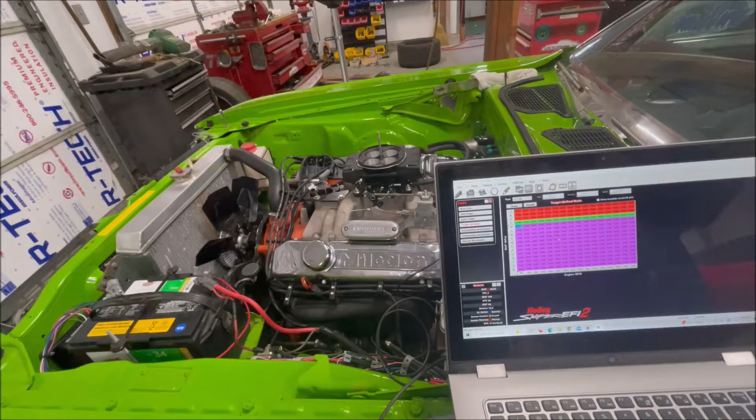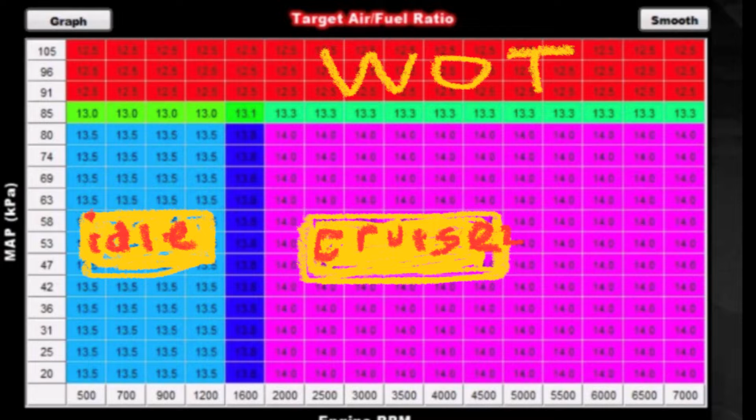All right, so we're gonna work with the first part of setting one of these things up. And one of the things that you need to do is you need to go into the target air fuel ratio table. And if you look just how generic they set it up, okay? Here's your RPM, here's your vacuum or your map sensor here, okay? And as you're idling, you're usually somewhere around here. And as you start to accelerate, it moves up and up. And here's wide open throttle at the top. So these are just set up very generic, okay?

What you need to do is, like I explained in the previous video, is you need to figure out where your car idles. And you'll look over here and find out where it idles. And then you need to figure out, hey, what is it like, okay? And I always start with the fuel first, and then I'll go to the ignition timing after I've kind of figured out what I want. And there's just basic knowledge. I mean, unless you're turbocharged, if you're just a naturally aspirated engine, stuff's pretty basic, okay?

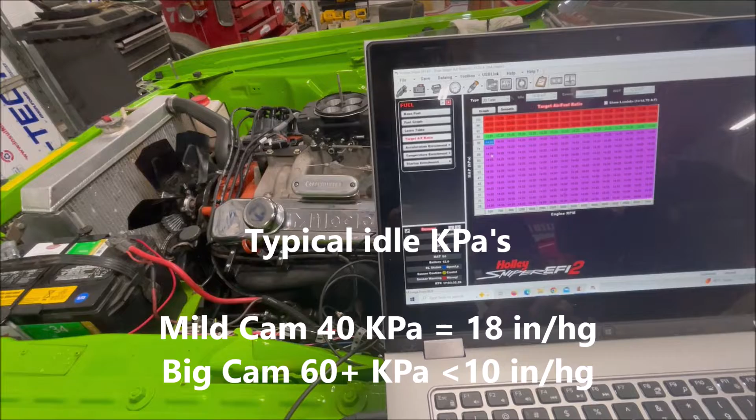So this engine's got a really big cam in it, and so it really doesn't make a whole lot of vacuum, and I don't know specifically really yet what it was idling at KPA-wise, but I'm gonna assume it's up here in the 60s. And 14-to-1 on this engine is probably okay. What I'm gonna do above this here is take this 14 and I'm gonna bump it down. And so I usually just use the control button and the down arrow keys, and we're gonna drop those things down.

And the nice thing is Holley uses a heat map, so you can see where your things are changing. And as far as cruise values go, 14-to-1 is pretty good here for the most part. On a milder engine, man, I'd have this thing cruise at 14.2, 3, 4, 5-to-1. Idle, same thing, 100%. So one of the things I'm gonna do here is actually take this thing, and in these upper ranges, you're only gonna use these most of the time as you're accelerating from an RPM. It's gonna go up and you're gonna want more fuel in there. So we're gonna lean those out, or richen those up a little bit.

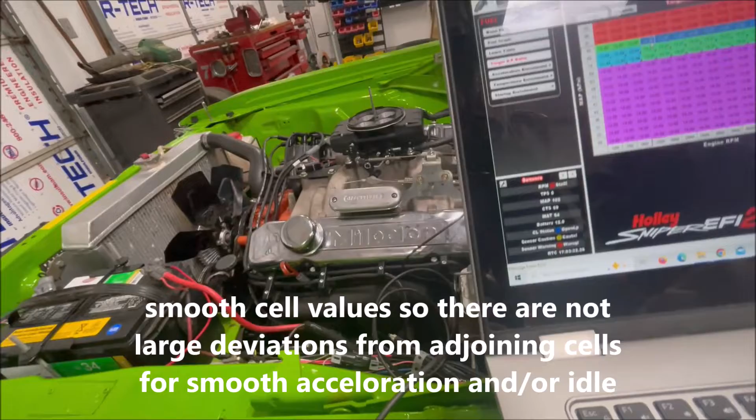So what you can do is, this is just going to be our preliminary stuff here. And you're going to want to take and you can kind of smooth the transitions. These don't have to be all the same values. You can take and step them so they change as they go. In fact, we'll take this row here and we'll drop it a little bit. And 12.5-to-1, that's fine. On wide open throttle, I generally would do anything from 12.5 to 12.8, depending on what you got. So anyway, that's what we've got for target air fuel ratios.

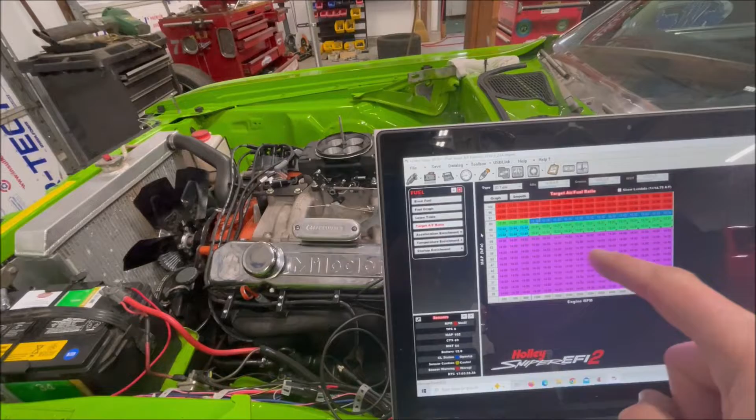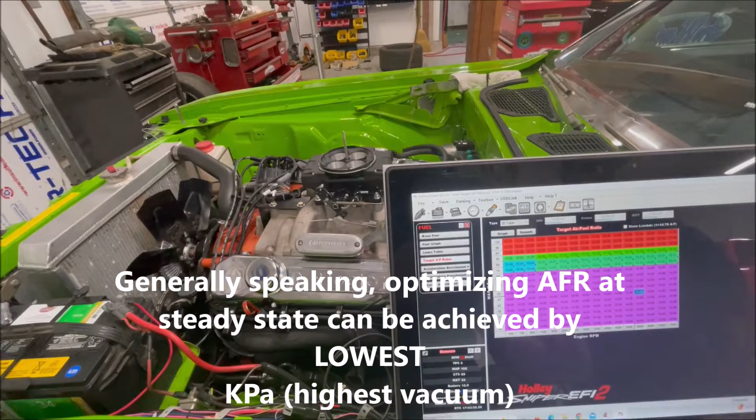Just changing them. And as we run this thing, I'm gonna play around with them a little bit. When I absolutely find out where this thing's cruising at like 60, 65 miles an hour down the highway, I'm gonna play with those and see what the engine can tolerate. You kind of want to go as lean as you can without it being an issue. And one of the things where you'll find if it's an issue is if you're trying to pull a grade or something like that, if it's got too much timing or it's too lean of a fuel mixture.

So I'd always try to err a little bit on the richer side than the leaner side. So we're gonna go over here to spark, okay? And again, you see how it's grayed out? And by the way, once you change this with the laptop and you go to the 2D table like I'm doing here, you won't be able to change your idle, cruise, and wide open throttle values from the handheld anymore.

So as far as spark timing goes, I'm not sure specifically what this engine's gonna work at. 16 degrees is pretty good. But it goes 16, 24, and then 34. I'd rather see a little bit more of a transition myself here. So what we want is once you bump it off idle to start ramping it up a little bit. So we're gonna actually add a little timing here to make the transition a little smoother. So we bumped it to like 19 degrees, and you can see it changes.

Now on a Mopar, a big block Mopar, it's 38. So I'm gonna leave it 34 here, and then we're gonna have it basically gradually go up to 38. But I think I'm gonna start with maybe 36. So what I'm gonna do is kind of go from here, highlight these cells here, and then we'll bump them up. 36. Okay. And we've got 36, 35. I think this row here, we should probably make it 35. And we didn't go to the 36, excuse me, 36.

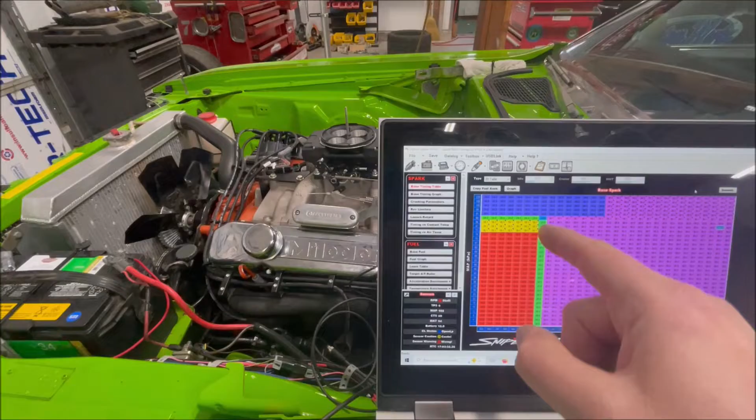So basically, again, this is going to be your idle range. This is going to be your cruise range. This is going to be wide open throttle. And what you want to do is smooth the transitions in between the two. You don't want big jumps. The way they've got this set up is it's got big jumps in it. And one of the things that you can do, there's a button over here, a smoothing button. So if you have values here that are low and high here, it'll kind of transition them in between. And that's kind of a good feature.

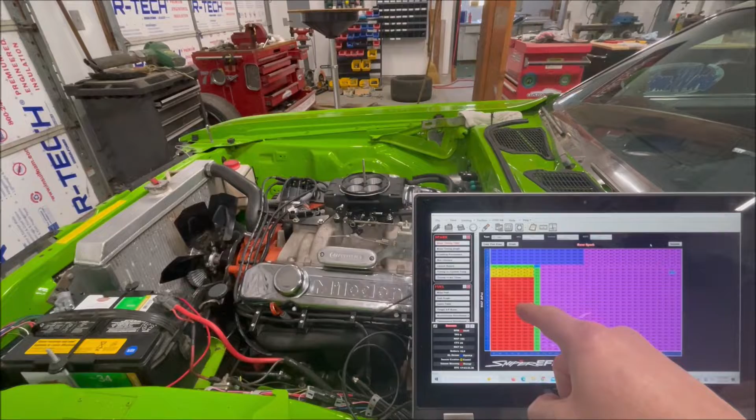So once you get your main areas fixed, like I said, I'm going to run the thing. We're going to run it at idle, figure out where it idles, and then we're going to drive it and find out where it cruises at. We know where wide open throttle is. Wide open throttle is going to be right here at that 95 to 105 kPa. So anyways, we'll fire this thing up at idle, and always start first with the idle before we do anything else.

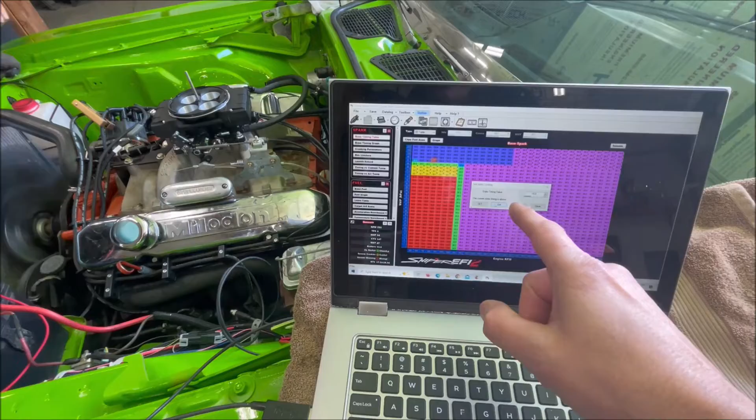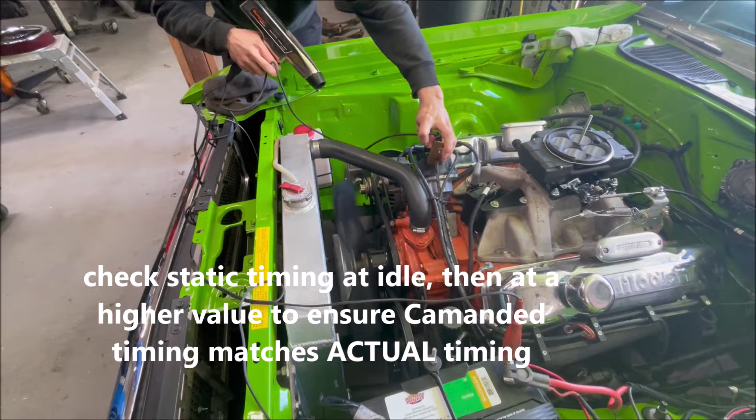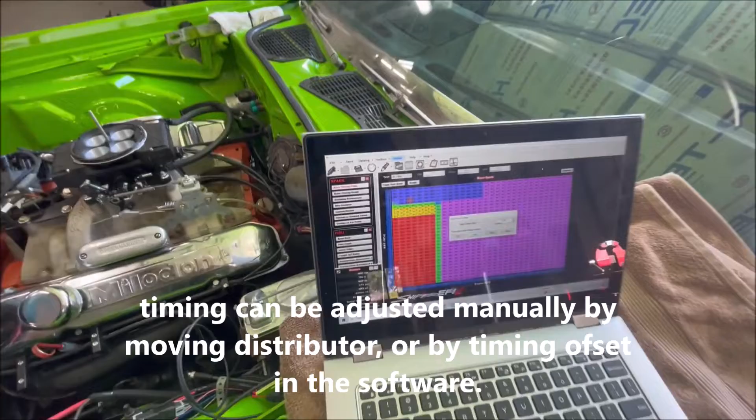Okay, so we've gone into the drop-down menu here, set static timing. We've set it at 15 degrees. Now we got the timing light. And we've confirmed that we are at approximately 15 to 16 degrees, and that's close enough for now. We'll check it later at a higher value.

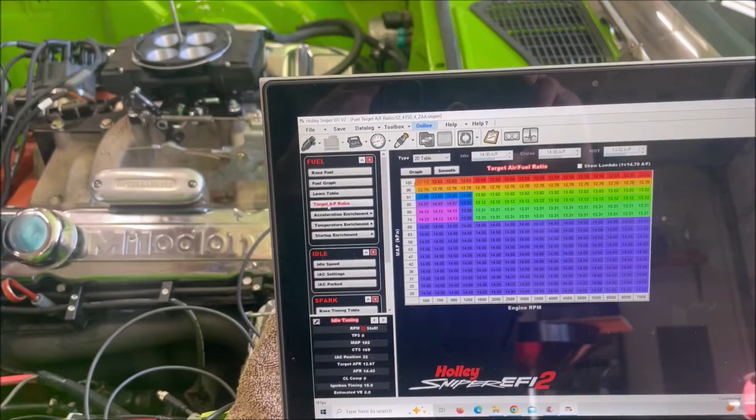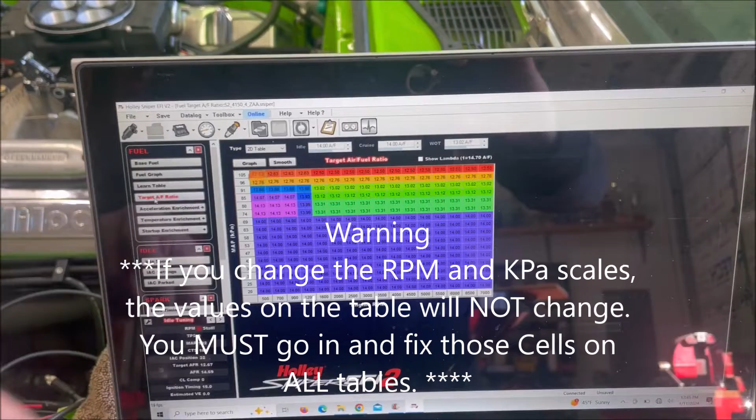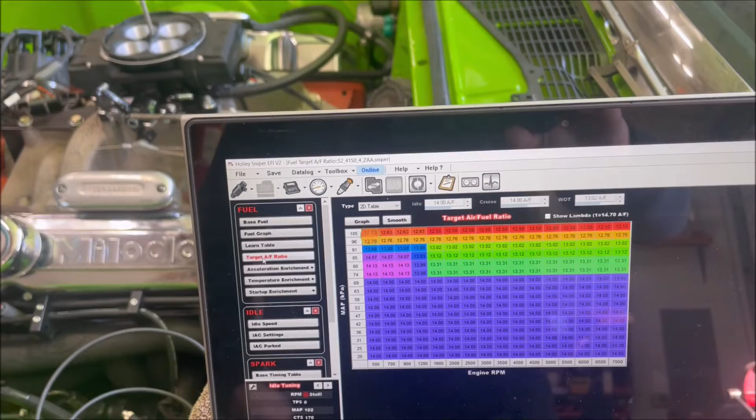All right, so one of the things that we noticed on this engine was it doesn't make a lot of vacuum, regardless of the issues we had with it before. It's idling at around 85, 86 kPa. So basically we've rendered almost this entire lower part of this map useless. And this is kind of an extreme situation. This is a big cam. It's a 440, but it's got a solid lift cam in it, and it's like 250 something to almost 260 degrees at 50 thousandths. So that's a big cam, okay? And so it's idling up here. So what we've really had to do is concentrate on this map here and narrow it down.

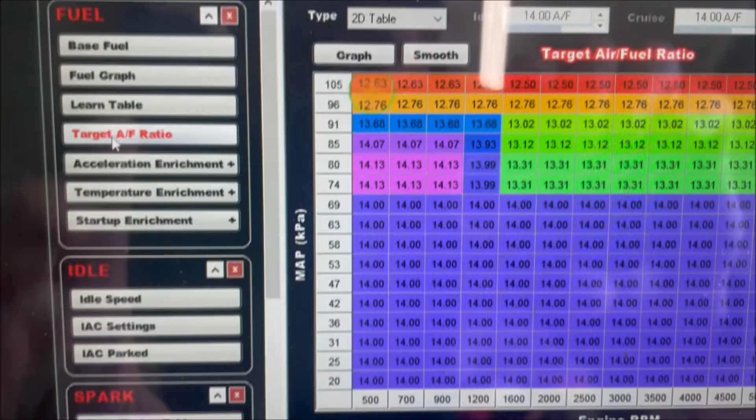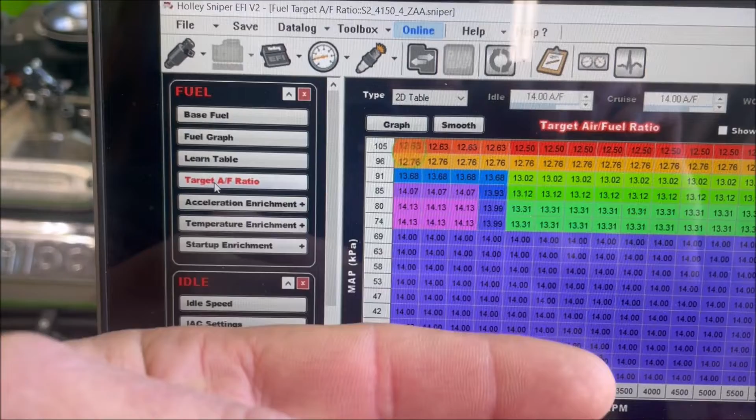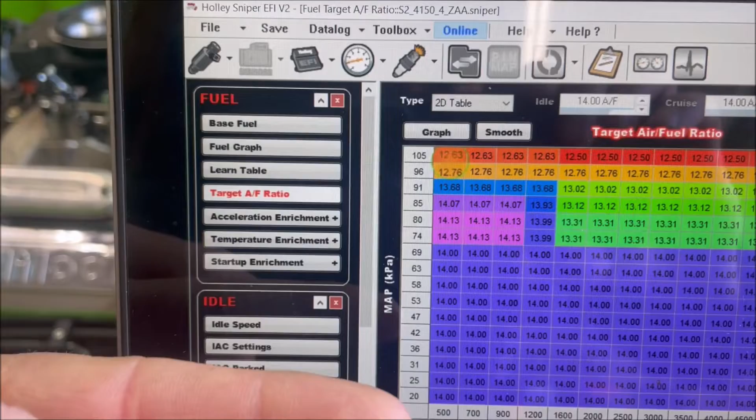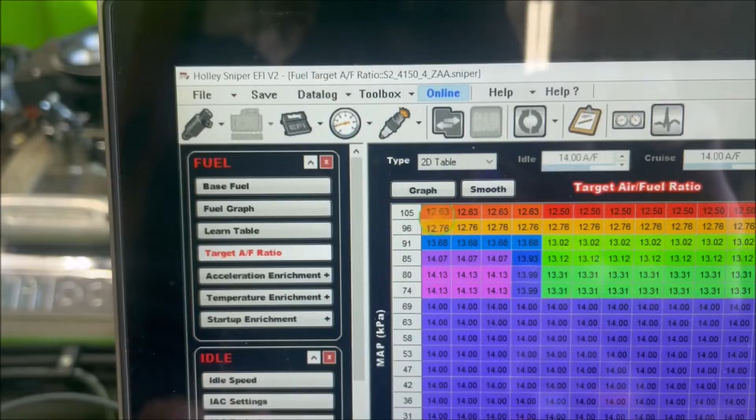Now you can change your scaling over here, and that might be something we do in a long-term situation. Since we're not really using stuff down here, we can actually make our map start down here at, we'll find out what the cruising kPa is, and then instead of it starting down here at 20, we can make it start at like 42, which would give us more resolution up in this area, so we don't have to make big skips in between. And those are extreme cases, and again, this car probably wasn't the best example of what we need to do.

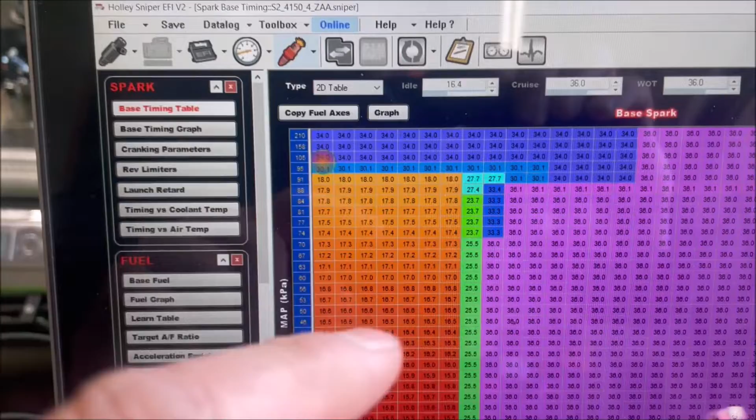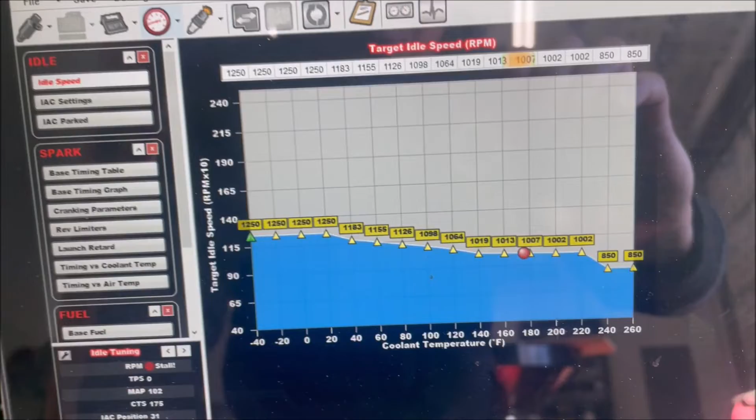So one of the things that we did here is you go into the timing, as we played around with the timing, because it's idling way up here now instead of way down here. So we've played around with that, and then if you notice, it idles. We got this thing idling at 1,000 RPMs, and that's where it's really happy.

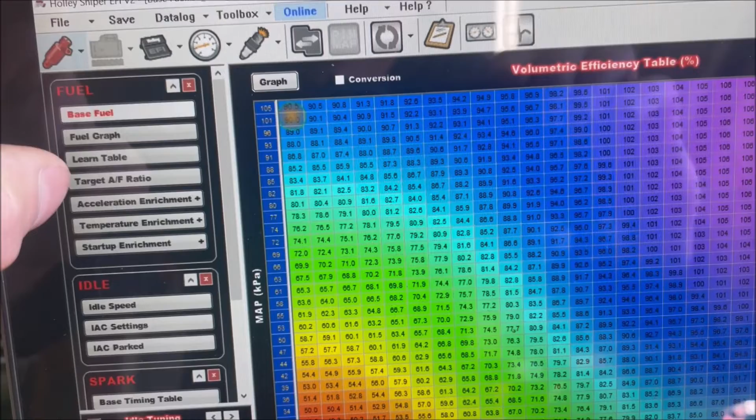And by doing that, we were actually able to get it to idle. It was reading more like 90 kPa, and we were able to get it down to like 85, 86 kPa. And 5 kPa at idle is quite a bit of change in engine vacuum. So the engine was definitely happier.

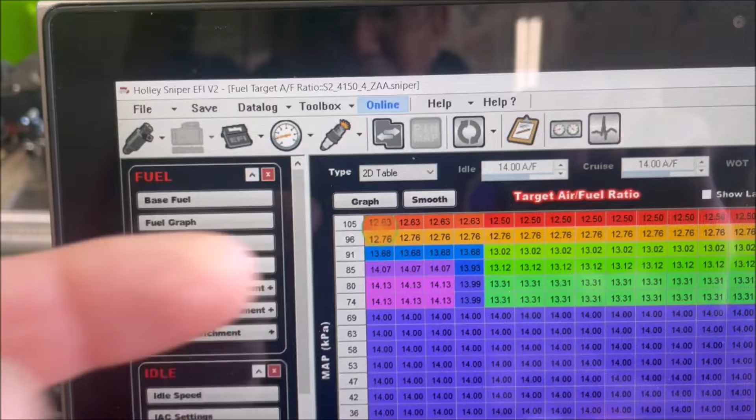And one of the things that you can do, kind of like you do on a carburetor, lean dropping it, is play around with the air-fuel ratio, and I'll start this thing up in just a second, and play around with it, and then look at your kPa, and remember that as the thing drops down, that's going down. Lower the number on the kPa is more vacuum, okay? The higher the number is less vacuum.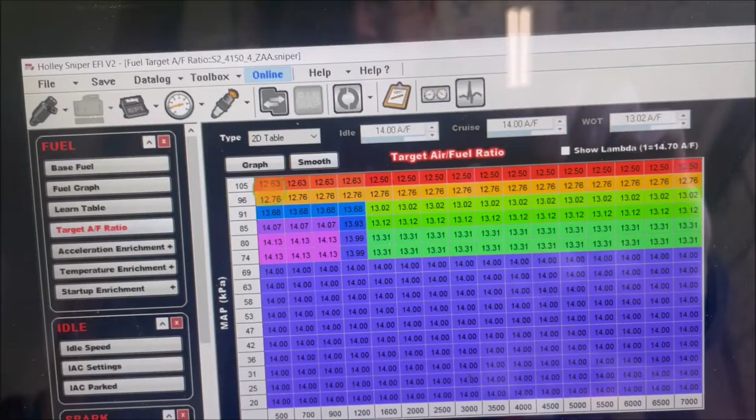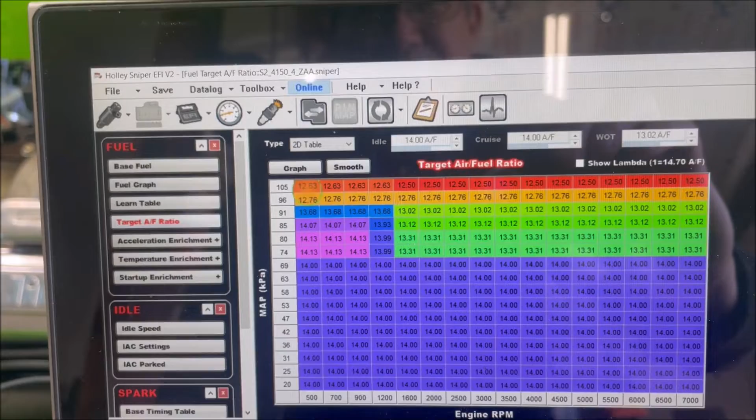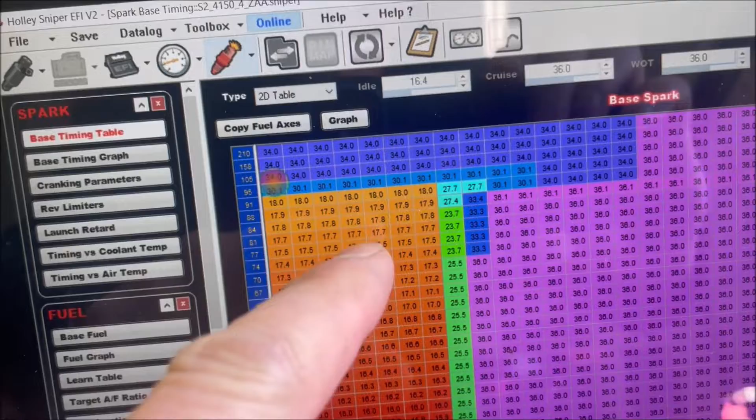So you can play around with your air-fuel ratio and your timing, just like you can with an old school carburetor, to try to get the best vacuum. And you can even find idle timing at 20 degrees, 25 degrees. It's not a big deal. And the beauty of it is you can make it 25 degrees here. Let's go here to the timing. You can make it 25 degrees here where it idles, and then actually, as you accelerate, make it drop down a little bit. And you can really get a good idle out of something.

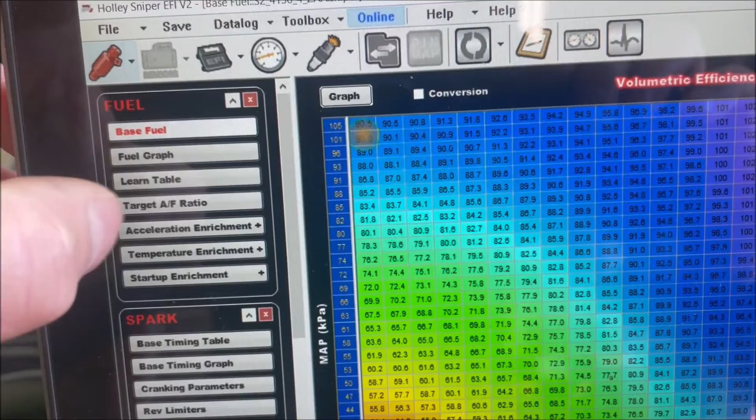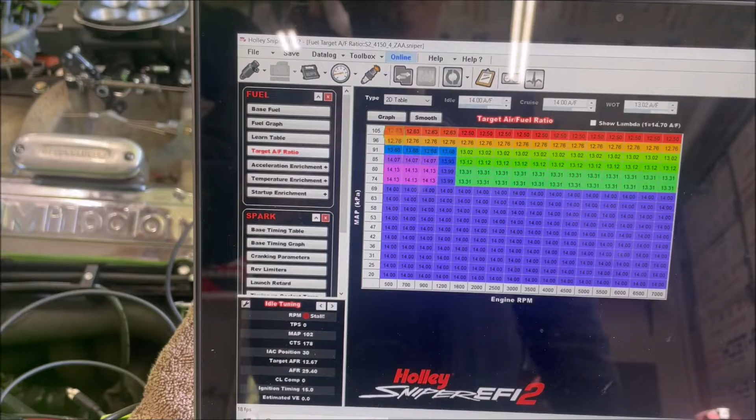So let me fire this thing up. And we've already set the throttle blades and the IAC. So when this thing's hot, you want your IAC, you go over here, and I watch it in this little window, the IAC, you really want it to be really low. If it's at its target idle speed, and it's at around 0, 1, 2, 3, 4, 5, 6, 7, 8, you're good, okay? You don't want it to be at 0 and be 200 RPM above your target idle speed. So let's fire this thing up, and we'll give you an idea how this thing runs.

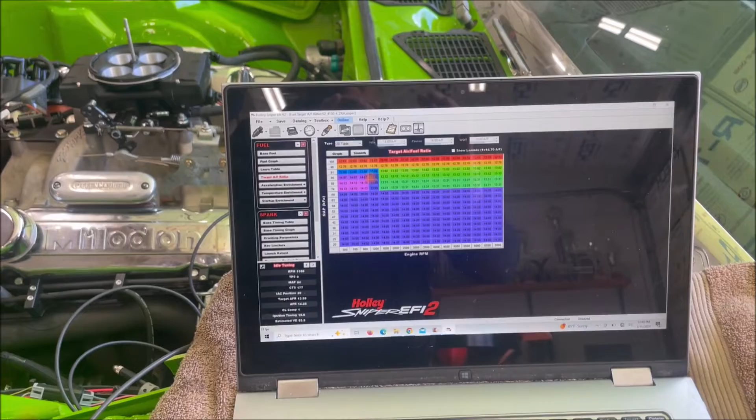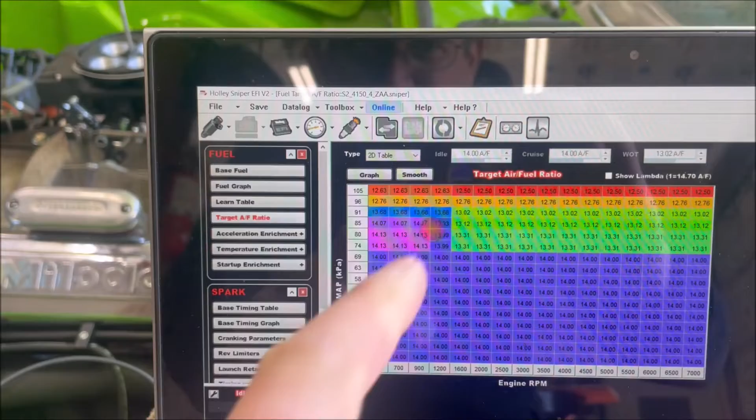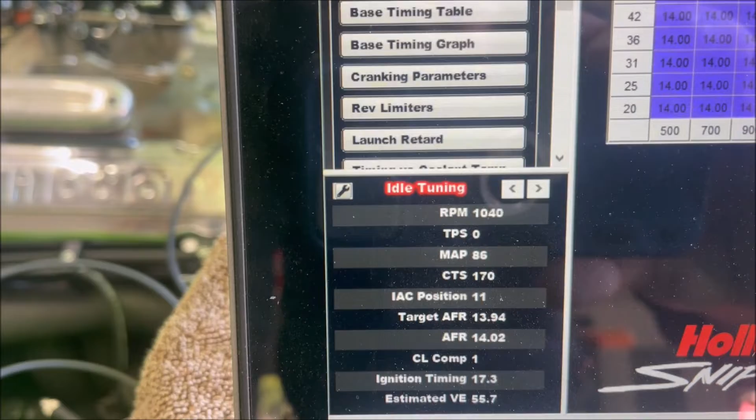So as you can see, it's on its IAC, and it's idling a little bit above its target idle speed, and then it'll actually ramp down a little bit, and you can see what everything's doing here. And our kPa is somewhere in the 80 to 85 range.

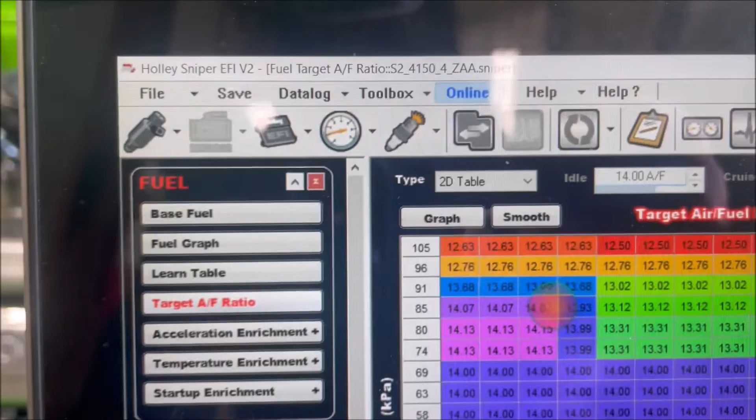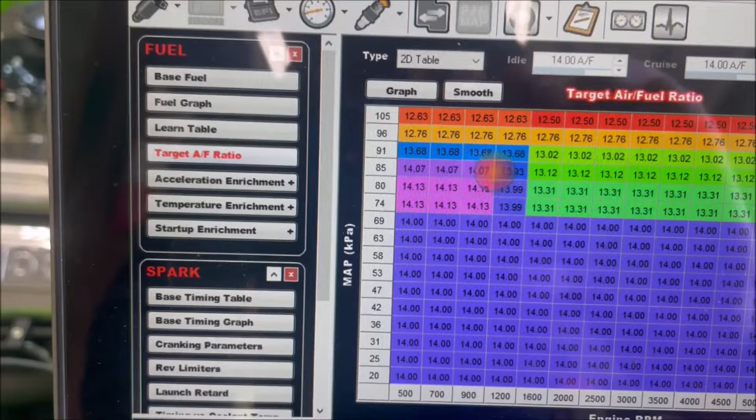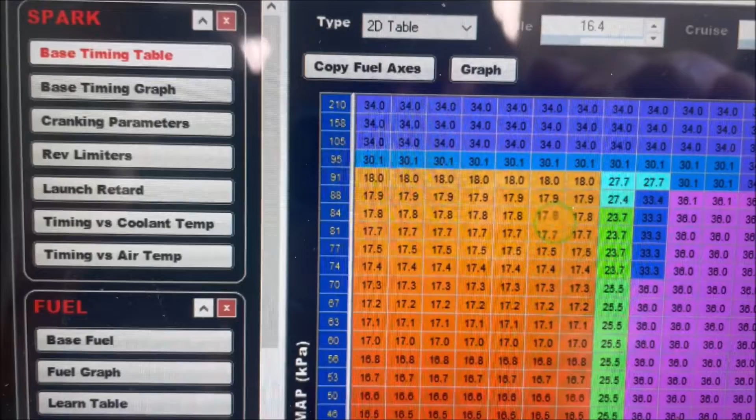And what you really want to do to get a smooth idle is make sure that these boxes, these values, as that bubble moves around a little bit, are as close to the same, not big leaps and changes in between the two. And on the spark, you want the same thing too, because as it changes half a degree of spark moving around, it's gonna make the idle hunt, and that's how you're gonna get a good smooth idle out of it.

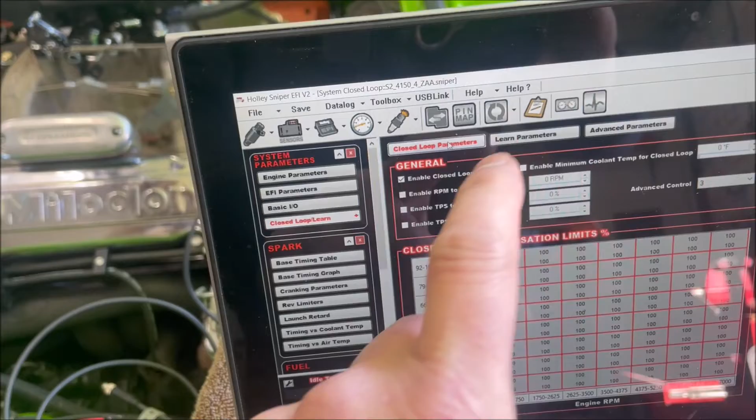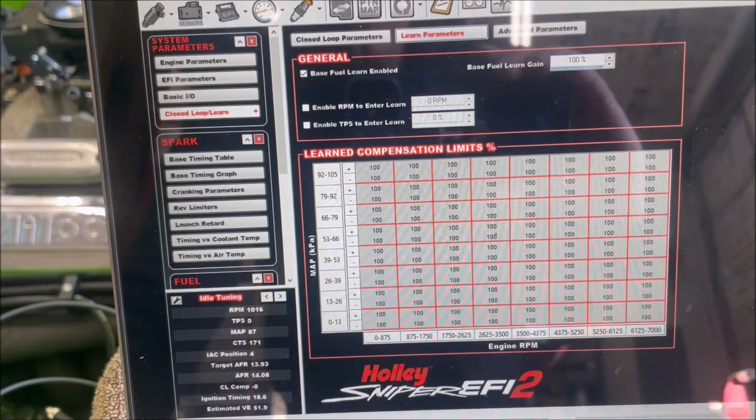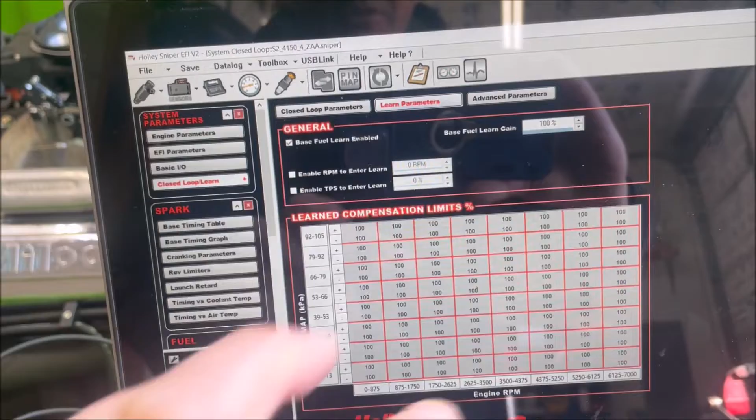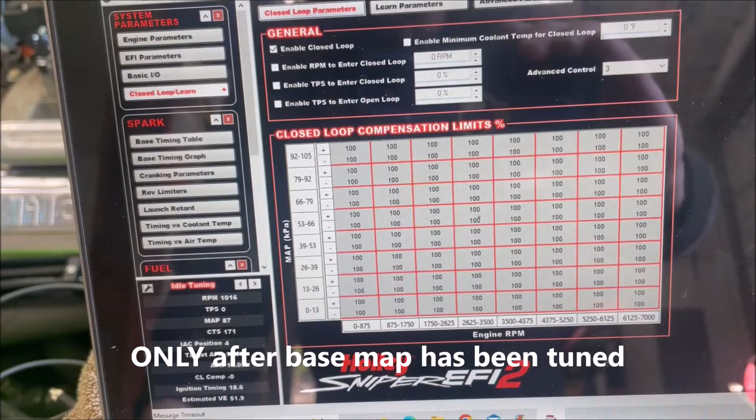Okay, one of the things in the setup that you've got to make sure is that it defaults to this, that you've got enable closed loop, you go into learn, enable fuel learn, and right now these are all set at 100%. And as you've got the fuel map more dialed in, you will want to change these numbers to a smaller value. And generally the learn, I would take it down to around 30-40%. The closed loop, same thing, around 30-40%. And the reason why is that's for seasonal changes in weather and atmospheric conditions and stuff like that.

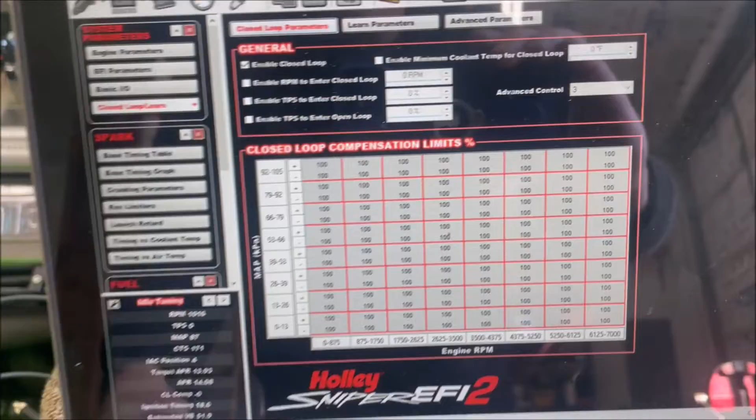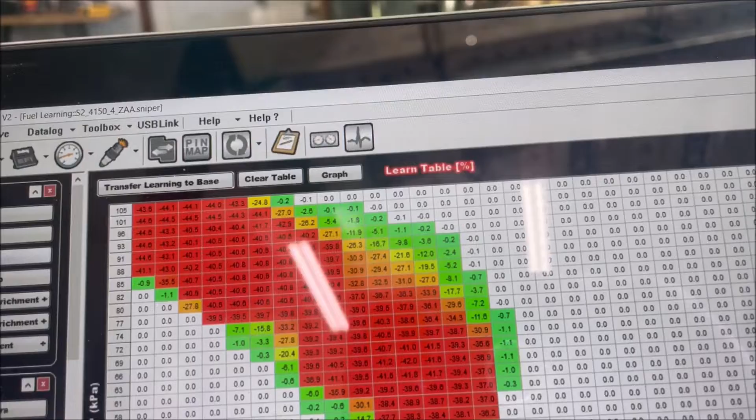And one of the ways that you can really tell is obviously your O2 correction. But one of the things that you can really do is go over here to your learn table, okay? And your learn table here is really kind of the heart of the self-tuning Holley stuff that it is so famous for. And you see in the red there, that thing's saying it's minus 40 something percent fuel. And this is where it's idling, and I've probably revved it up a little bit, and it's gone into this section, then it's dropped down, and then it's gone back to idle.

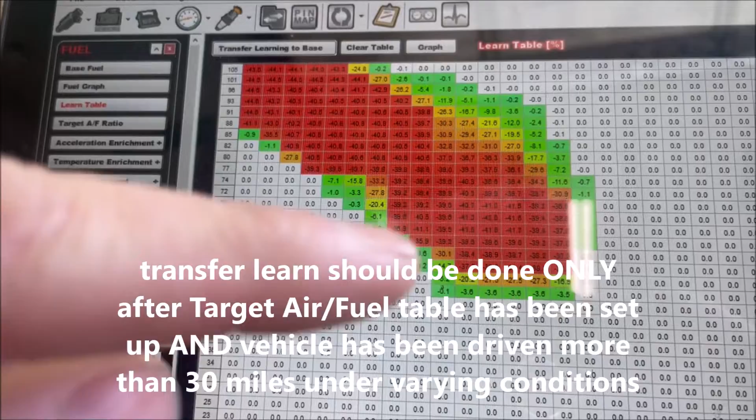So once you get your system really dialed in, what you'll do occasionally is you'll transfer this right here. It says transfer learning to base. You'll click this, and it will actually change the numbers in your fuel table here. Okay, see this table here?

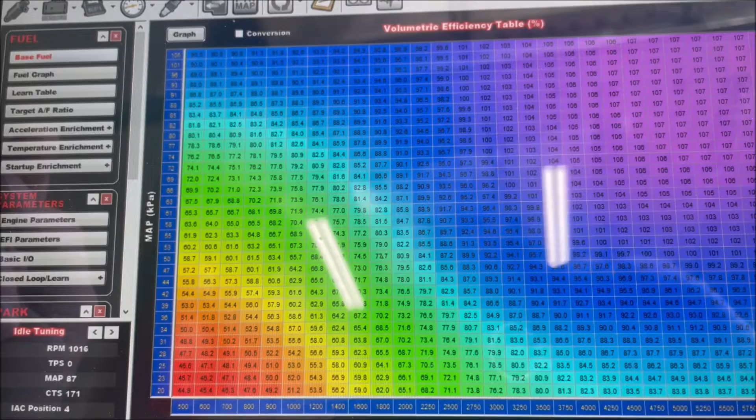It'll change those, okay? And so when you go back to your learn table, on a really good long-term learned engine, these numbers will always be changing, and you'll see minus point something, minus 2, 3, 4, 5, 8, 10, and that's a good map. Once you get to that point, you can just leave this thing alone, and you're done.

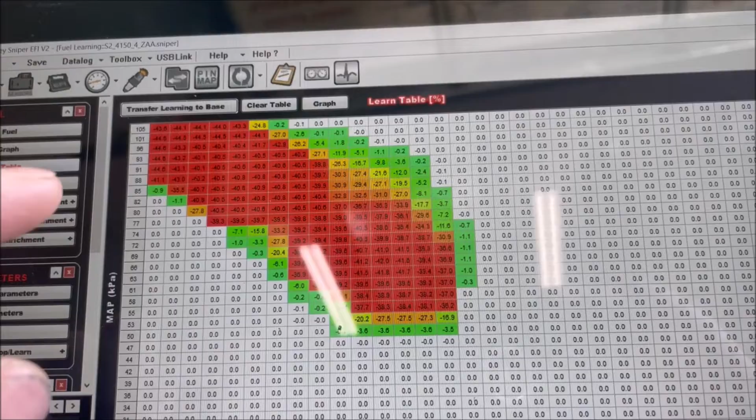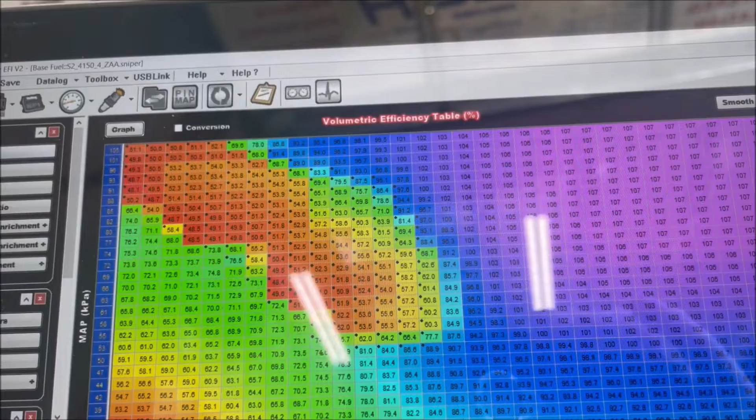But for the time being, once I run it quite a bit, I will actually do this transfer learning to base. And it'll say, do you want to smooth the value? Sure, go ahead and do that. And so now your base fuel map has been changed. And if you see, it looks kind of sloppy now, and you got to be careful. That's where the smoothing feature up here comes in. You can actually highlight this and re-smooth it.

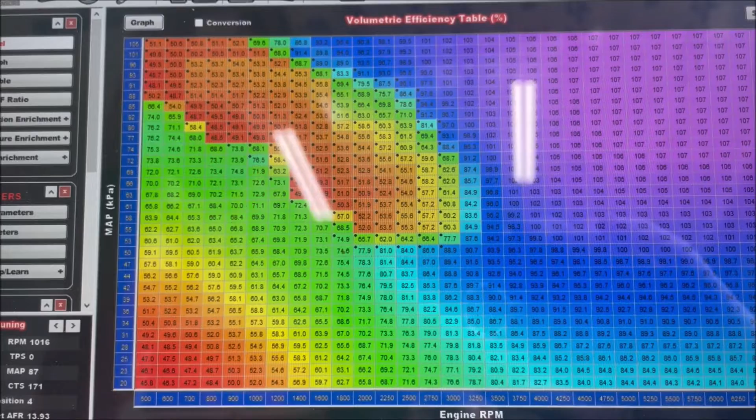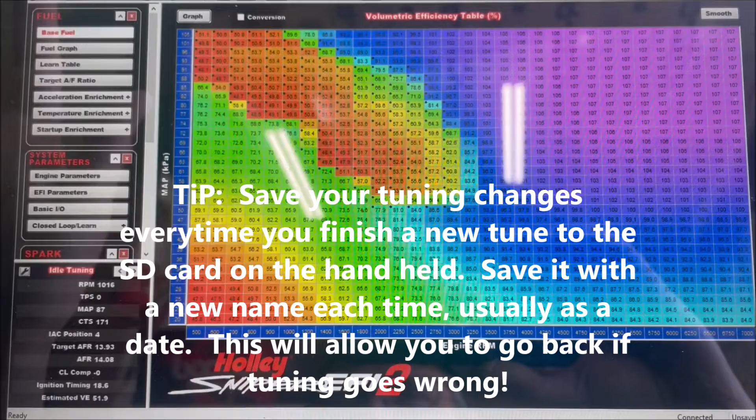And so you can see that it made changes to the fuel map. It's probably a bit premature. I was just doing it more for the video effects of this thing. I haven't transferred this to the ECU, so it really doesn't matter. But this is stuff you're going to do long term, and this video is more of just a short setup thing.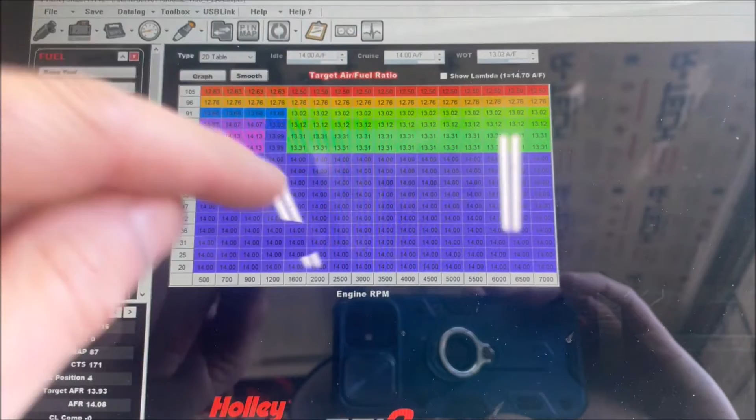But looking at your learn table here and seeing how much changes are being made is really telling you how hard the Holley's working to make everything right. And again, you're making everything right to your target air fuel tables that you set. If you don't set these correctly, the Holley's going to learn to an air fuel ratio or timing table that's not necessarily correct for your engine.

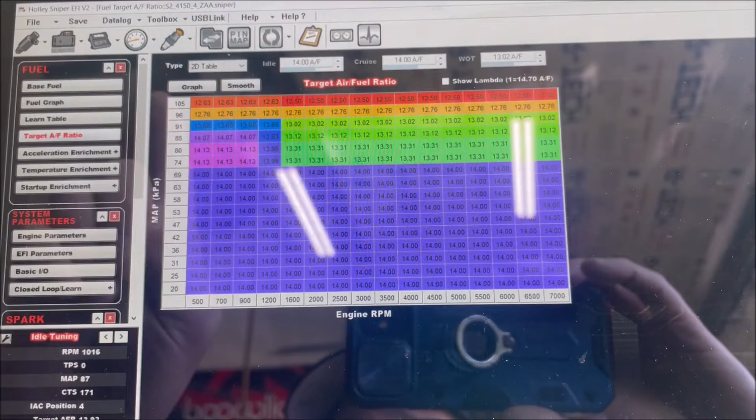So again, key points from this video: find out where your engine idles at, and try to make your idle kPa as low as possible. So play with your timing a little bit, play with your fuel. Generally get the fuel about right. Most engines are gonna be happy.

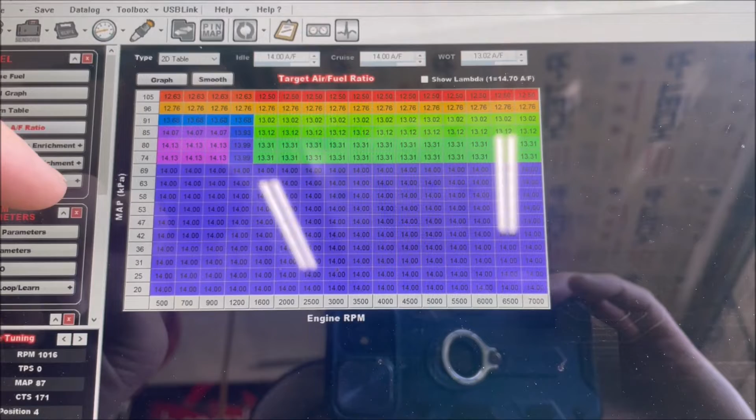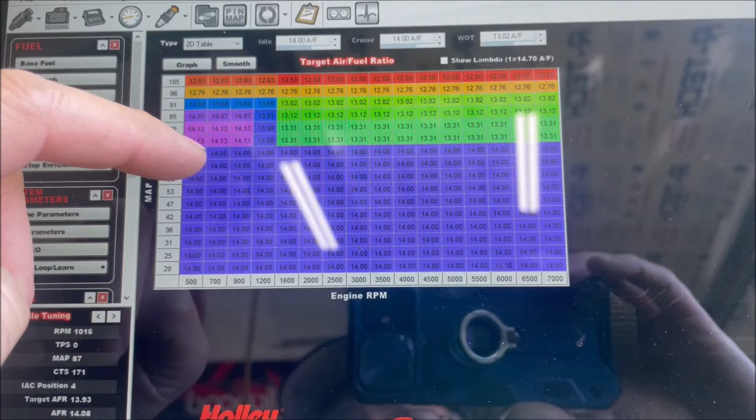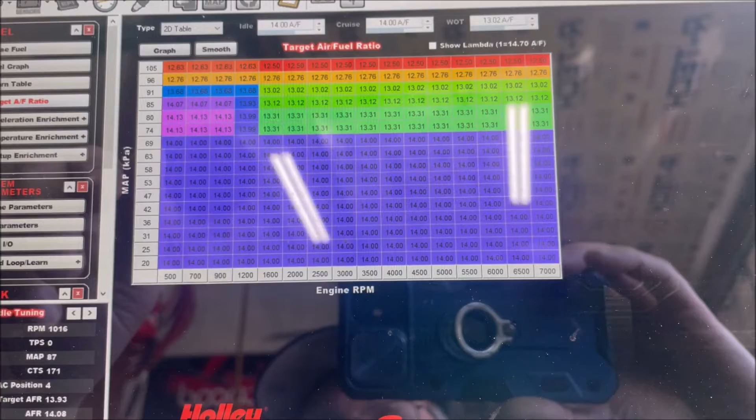If it's a big nasty engine, it's gonna be in the high 13s to 1 at idle, to a very mild small block Chevy, maybe 300 horse, it's gonna be happy, man. It'll idle as lean as 14.7, 14.8. Even probably 15 to 1 maybe, but be safe and go somewhere in the mid 14s if you have a mild performance engine. So get those all figured out and get the lowest kPa map reading that you can get.

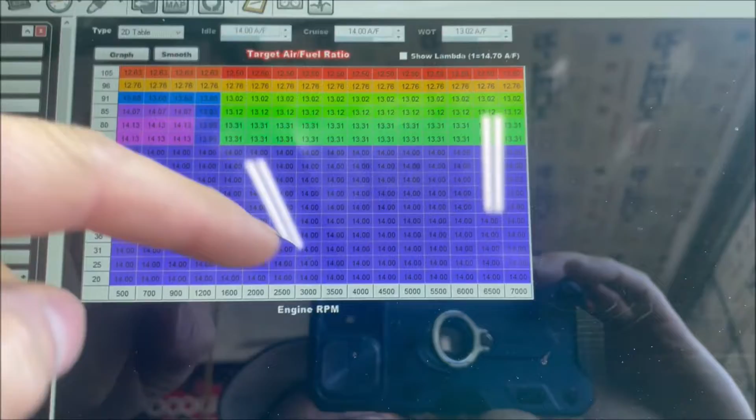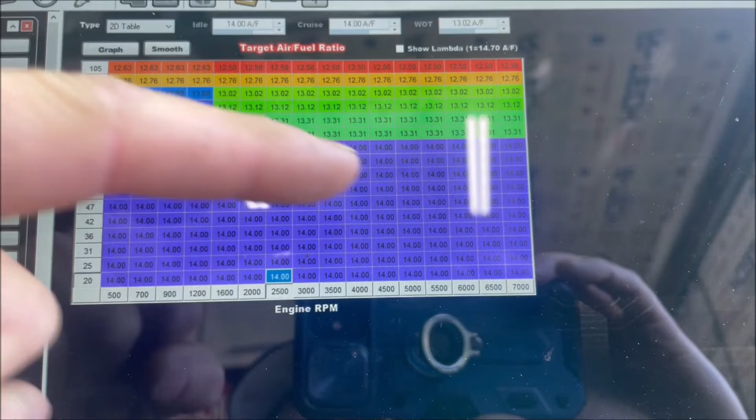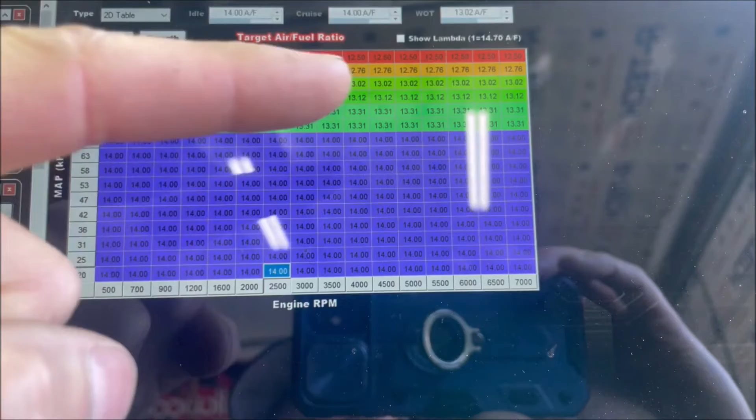And then go drive the thing and find out where is cruise. You're on the highway, you're turning 2,500 RPMs and 3,000 RPMs. Where are you on this map scale, right? And then tune those areas in. You want it to be as lean as possible that it'll be happy. If you're pulling a hill, you don't want it surging and struggling and whatnot. And then above that, you really want it to start putting a little bit of fuel in, because it needs it at those points. But figure those things out.

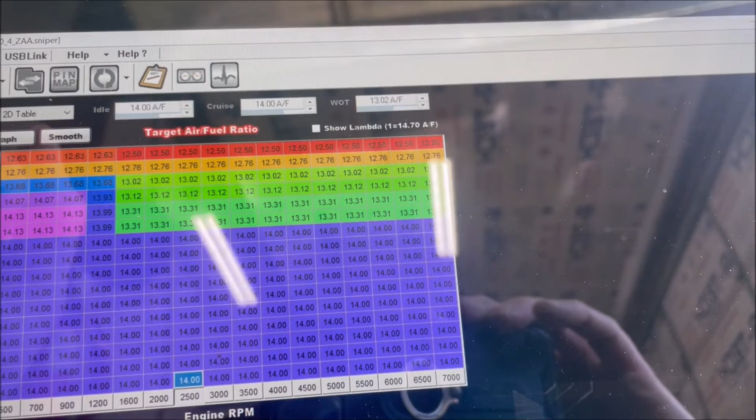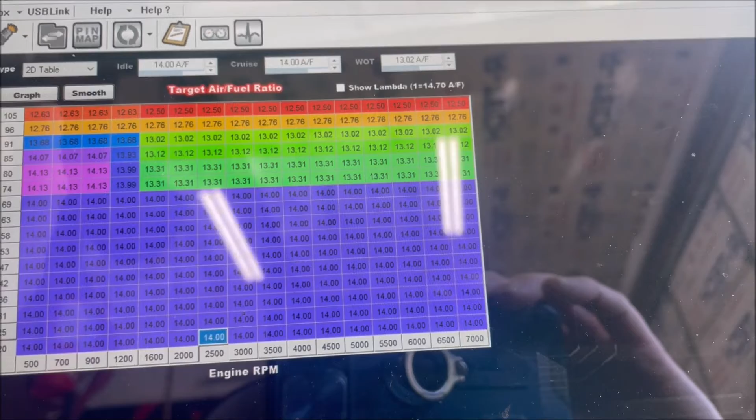And wide open throttle is always going to be somewhere on an NA motor between that 96 and 105 kPa. That's pretty much atmospheric value. And you'll see that if you just turn the key on and don't run the engine, your MAP sensor will probably be at atmospheric pressure outside, which is going to be in that 96. You'll see that your little bubble will be up here in this corner.

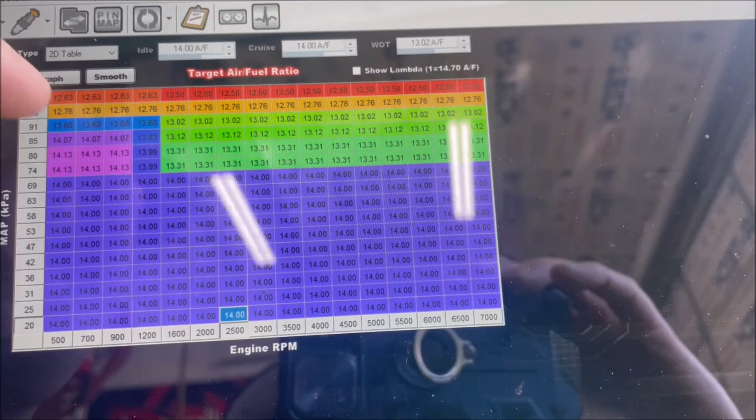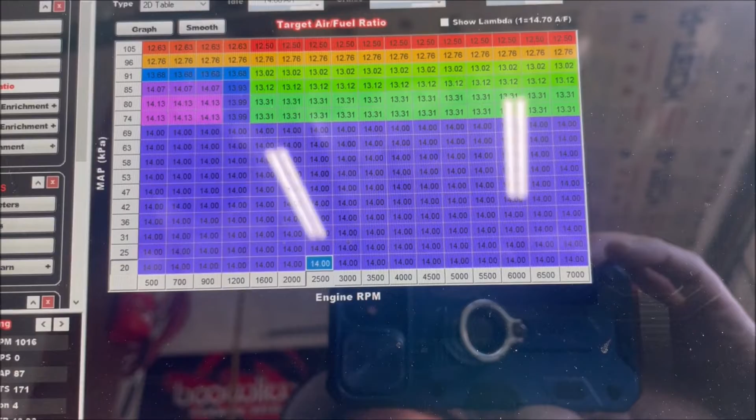And again, this wasn't the best example. This is more of an extreme example of tuning for an engine that's not a very streetable engine. The customer really needs to change the cam in this thing.